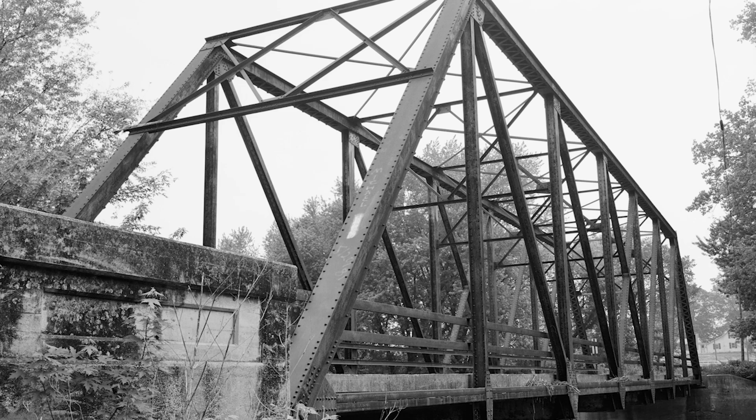No matter where you travel in Illinois, historic bridges are part of the landscape. These quiet monuments to transportation and engineering history are a link to the past that both visitors and residents can enjoy.

At the turn of the 20th century, Chicago's bridges were in dire need of renovation. Low on funds, the city could not address bridge upkeep or necessary replacements. In the summer of 1898, the Chicago Department of Public Works conducted a series of inspections of highway spans led by the city's head of municipal engineering, John Ericson. He found bridge conditions citywide to be unacceptable and noted that unless attended to immediately, some structures could prove hazardous to the public.

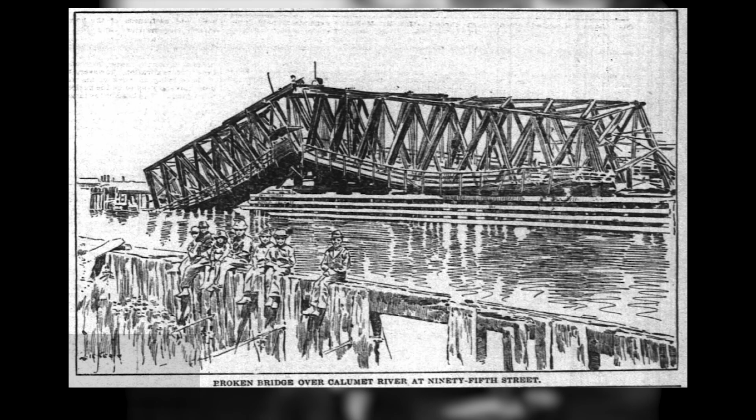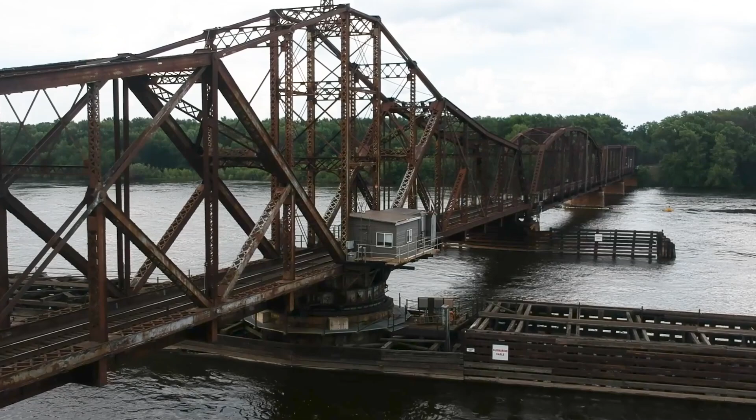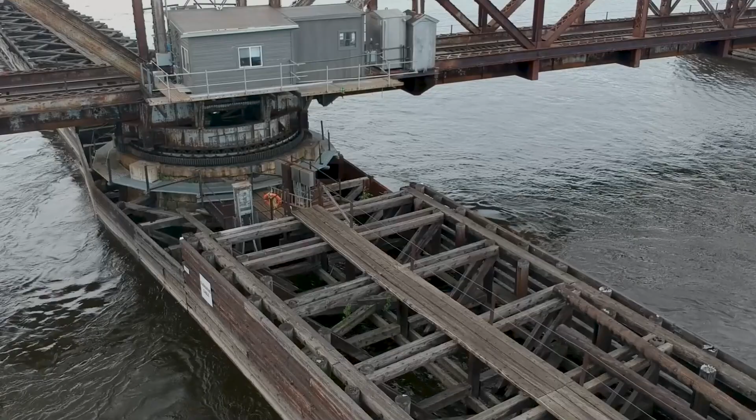Many of the bridges that needed replacing were swing bridges with center piers. Not only were they in a state of disrepair, but federal investigations on river navigation indicated an opposition to this bridge type. The center pier obstructed water traffic. Modern river traffic was requiring more and more space in the channel. As the size and number of vessels traveling the rivers and canals increased over time, the only viable option was to replace swing bridges with an open span design.

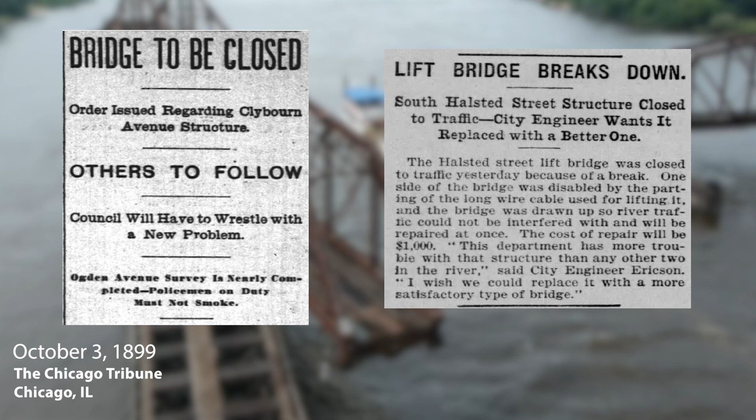In the fall of 1899, numerous bridges were slated for closure. One area that was particularly impacted by the closures was Goose Island.

Goose Island was created in the 1850s when the Chicago Land Company purchased a tract of land to the east of the Chicago River. William B. Ogden, a major shareholder in the company as well as Chicago's first mayor, directed the dredging of a canal on this tract of land along the river between North Avenue and Chicago Avenue. The clay from the dredging went to brickyards or for use in landfilling. The canal itself both created a more direct route for river traffic to travel and provided more waterfront property for the manufacturing industry.

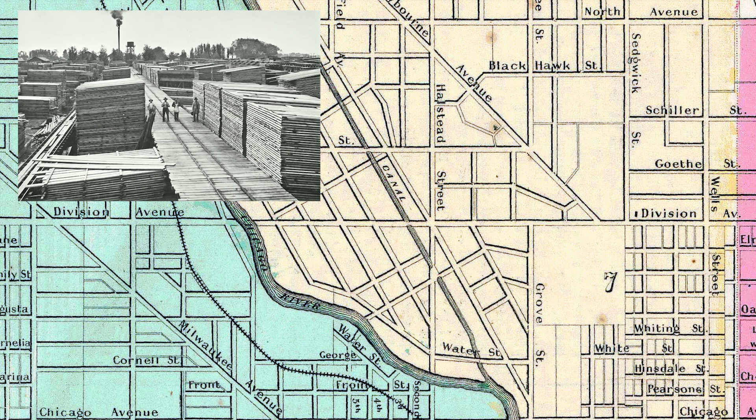According to the Chicago Tribune, by 1885 the area was booming with industry, which included 13 lumber yards, 11 coal yards, 5 stone yards, 2 sand yards, and 2 grain elevators with 1.75 million bushel capacity.

By the late 1800s, 5 bridges crossed the Chicago River and the North Branch Canal onto Goose Island from the surrounding city: 2 on Halsted Street, 2 on Division Street, and 1 on Weed Street. These 5 bridges allowed the companies on the island to offload wares, and since the island was primarily industrial space, the bridges also allowed workers safe passage to and from their jobs.

According to articles published in 1899, however, only 2 bridges were open at the time: South Halsted and West Division. Of these 2, South Halsted was the only bridge deemed travel-worthy, as reports indicated the West Division Street Bridge would soon be closed due to a rotting center pier. Having only one safe bridge to cross was greatly problematic for the manufacturing industry on Goose Island.

In addition to the inspections, Ericson also began work on designing a bridge specifically for Chicago. Beyond safety concerns and the need to evolve to accommodate ever larger water vessels, Chicago was paying royalty fees for the use of bridge designs created by outside companies such as the Strauss Bascule Bridge Company and the Scherzer Company.

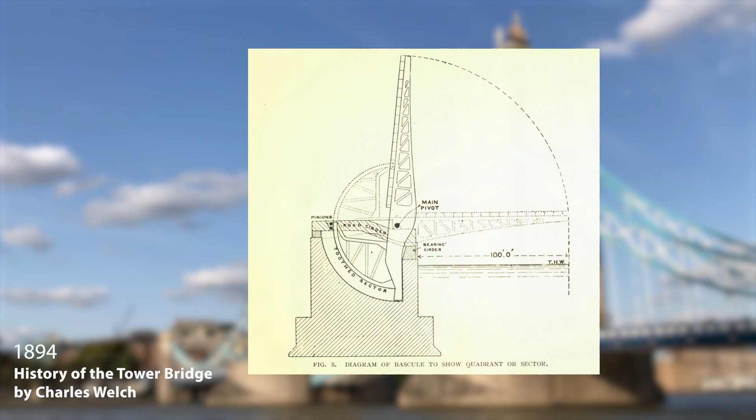The structure is a counterweighted, double-leaf, fixed trunnion bascule with below-deck operating machinery designed to raise the roadway for river traffic. Some of the benefits of the counterbalanced lever principle of the Tower Bridge were that it relied on simple operating machinery that was easy to manufacture and install. Best of all, this bascule mechanism was patent-free, so it wouldn't incur royalties.

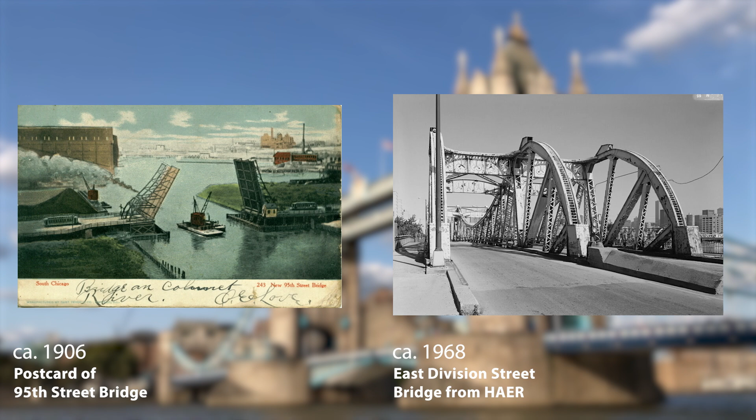After a rigorous review by independent engineers and the public, Ericson's design was tested. Variations of the design were constructed starting with the 95th Street and East Division Street bridges that opened in 1903. The Clybourn Street Bridge, later Cortland Street, opened in 1902 and included further design edits. At half the length, the Clybourn Street Bridge would be used as a prototype for the West Division Street Bridge.

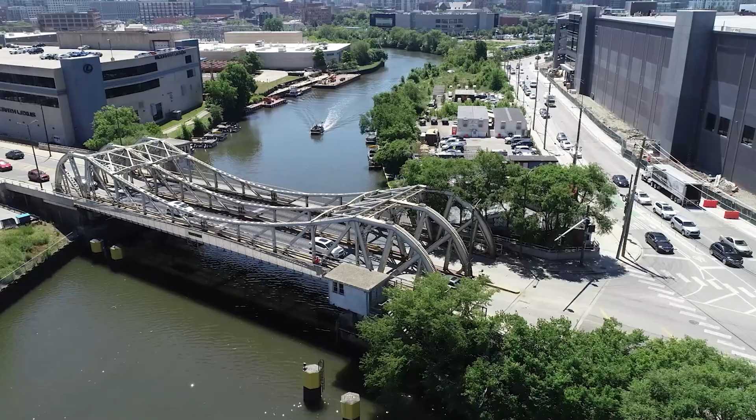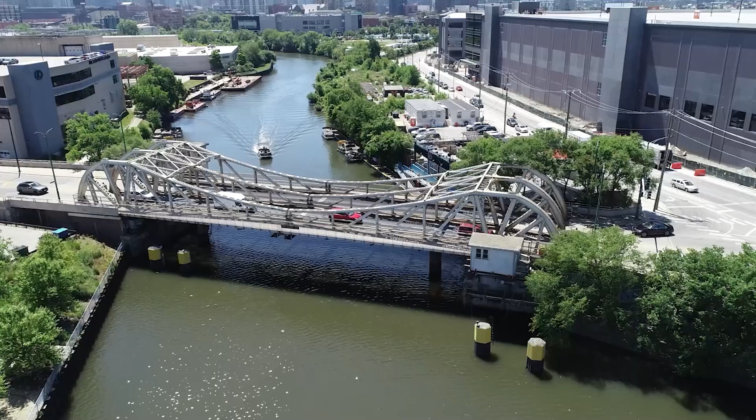The West Division Street Bridge over the North Branch of the Chicago River opened in June of 1904. The substructure was constructed by Fitzsimmons and Connell Company of Chicago, and the superstructure was completed by Roemheld and Gallery. It is 260 feet long and has two symmetrical halves. Each half contains a fixed, steel girder approach section allowing for one lane of traffic in each direction, and a movable leaf supported by three identical arching steel trusses.

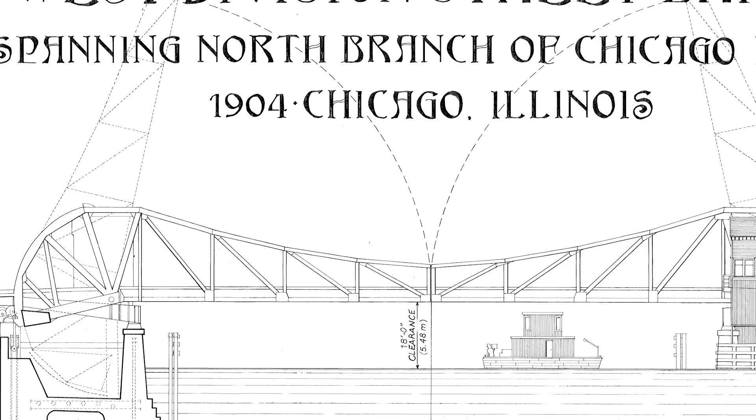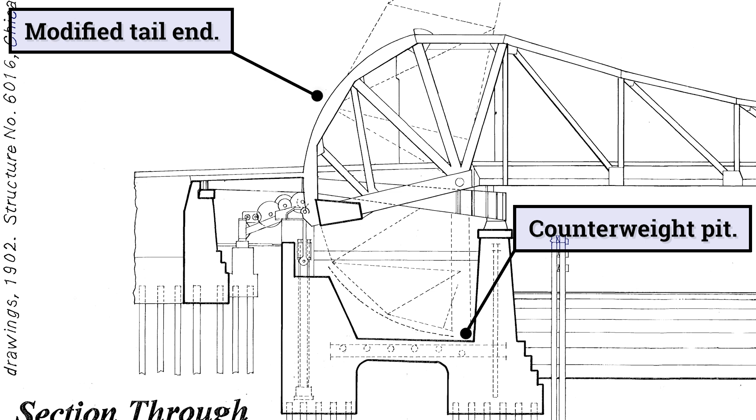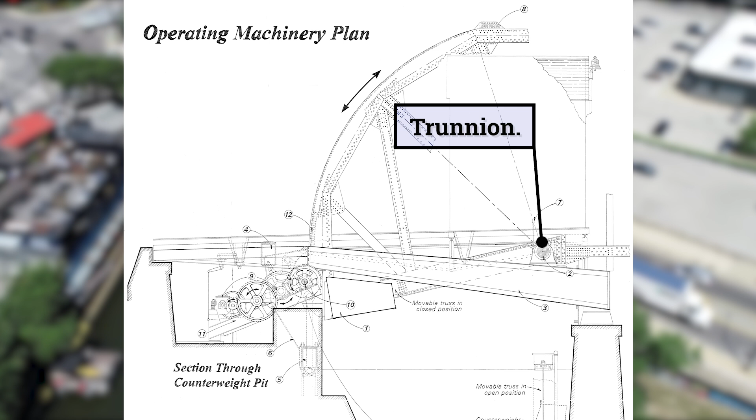The 7-panel trusses are modified versions of a Pratt truss. The configuration of their tail ends differs from the standard highway Pratt truss, allowing for a minimized counterweight pit footprint. The primary operational feature of the bridge is a 16-inch diameter cast steel trunnion at each leaf's center of gravity. This rotating axle lifts and lowers the movable leaf.

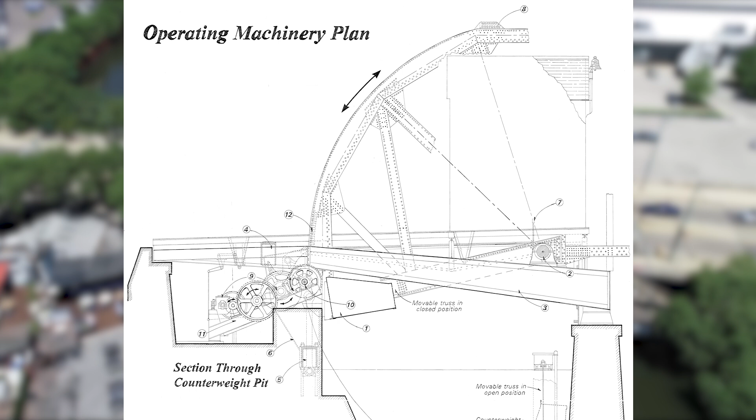Since the leaves were counterbalanced, little power was needed to lift and lower the bridge. 37 horsepower motors were mounted on steel platforms beneath the approach on either end of the bridge. The motors could be engaged independently from operator houses on both sides of the river.

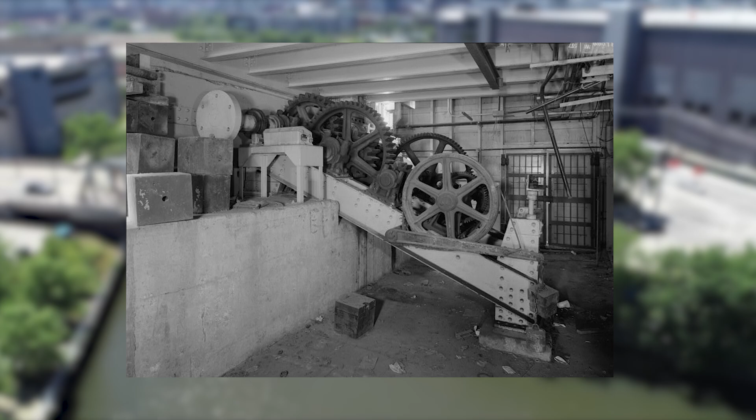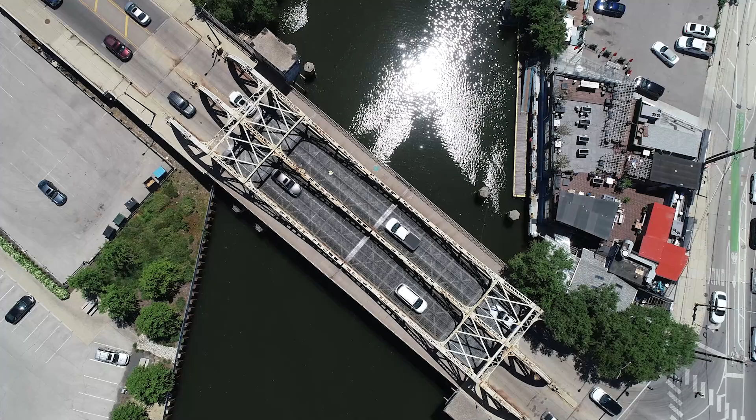Over the years, the West Division Street Bridge required minimal maintenance. Most repairs involved the replacement of machinery or wood decking. In the mid-1950s, the wood plank decking was replaced with steel grids. In the late 1960s, the original operators' houses were updated with a more modern design. During the 1980s, Chicago's Department of Public Works considered replacing the bridge with a new double-leaf bascule bridge. Though plans were prepared for the project, it was never funded.

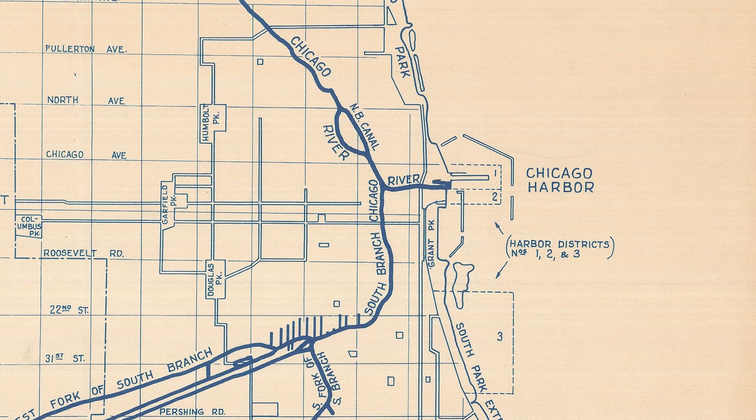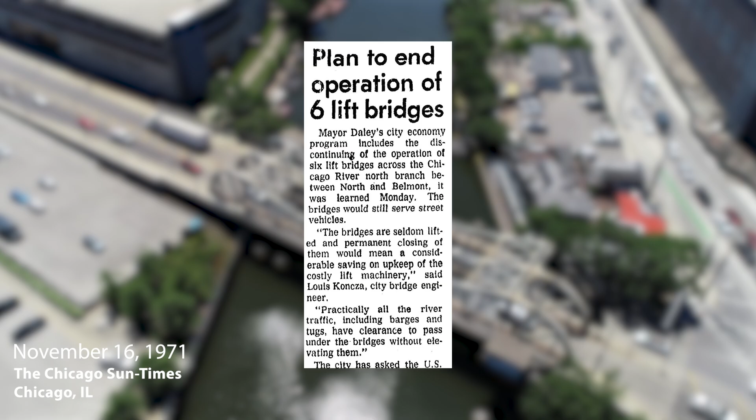Despite the success of the design in the early 1900s, the logistics of river transport evolved. By the 1920s, Chicago's river shipping patterns underwent a significant change. The Chicago River and Navy Pier began to lose traffic in favor of the deep harbor at the mouth of the Calumet River in South Chicago. By 1971, Mayor Richard J. Daley called for the closing of many Chicago river spans, especially on the city's north side. Permanent closure meant saving the city money on the upkeep of lift machinery.

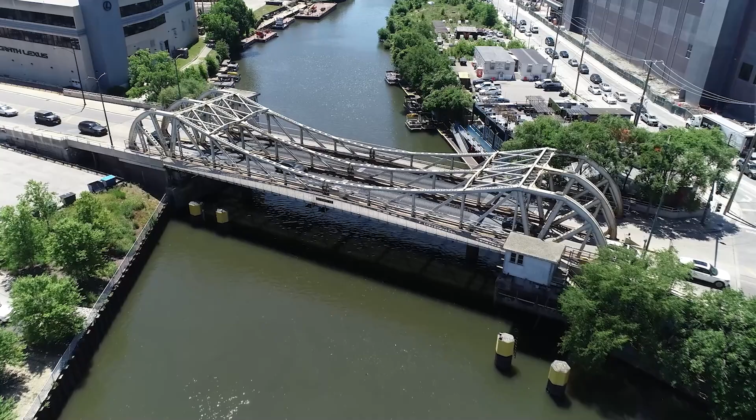In the 1990s, the West Division Street Bridge underwent major renovations as part of a larger project initiated by Mayor Richard M. Daley. The project aimed to declare Goose Island as a planned manufacturing district to protect the area's enduring industrial and manufacturing sector against redevelopment. At the time, the West Division Street Bridge was almost completely rebuilt with new structural steel.

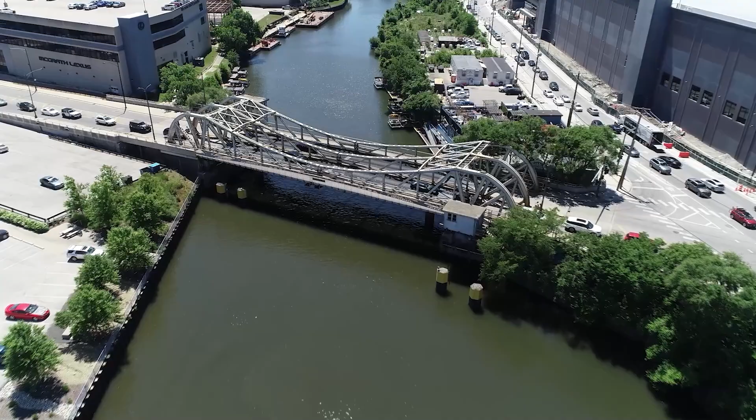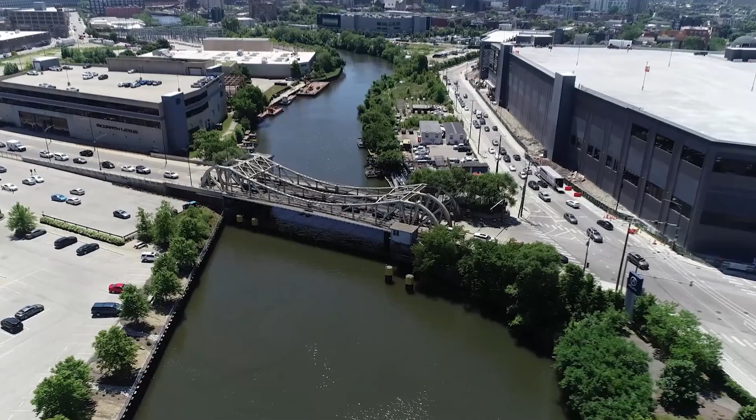However, the last time the bridge had opened for river traffic was the early 1980s. During the renovation, like other bridges on the north side, West Division was rendered immovable. The trunnions and lifting mechanisms were left in place, but the leaves were welded together and the operators' houses were cleared of control equipment.

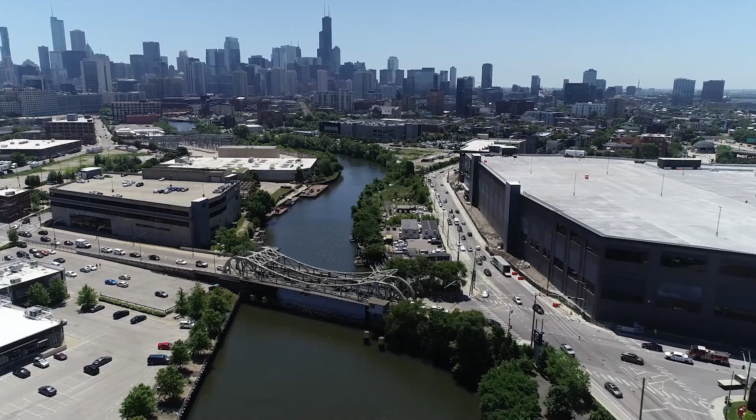To address the deteriorating condition of the no longer movable bridge and to adapt to the city's growth, the Chicago Department of Transportation decided to replace it. The project will improve access to businesses and properties across Goose Island and reduce congestion. The new design includes additional vehicle and bicycle lanes to facilitate traffic flow and improve commuter safety.

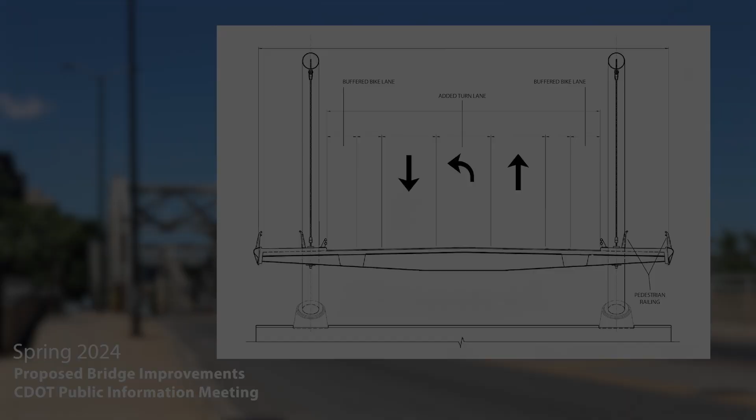For over 120 years, the Chicago-type bascule bridge was a vital part of the city's infrastructure. It provided the necessary space for a growing river shipping industry and was a much-needed improvement for road travel through the city, both for the manufacturing industries and residents. With 53 bridges built using Ericson and Pihlfeldt's design, this bridge has left an indelible mark on the Chicago cityscape. Plans are in place to salvage components of the old bridge and display them at the McCormick Bridge House and Chicago River Museum.

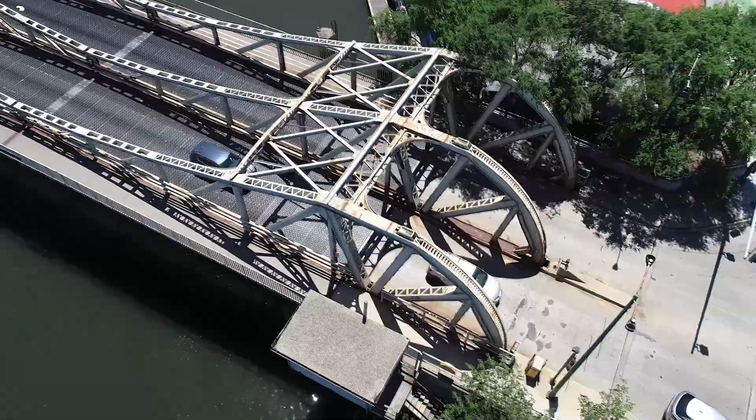Modern transportation needs place a variety of demands on infrastructure. A delicate balance is required when seeking to preserve historically significant structures and maintaining safe transportation and shipping corridors. Though it's not practical to save every historic bridge, it is possible to document them so that their importance can remain part of our state's story for generations to come.